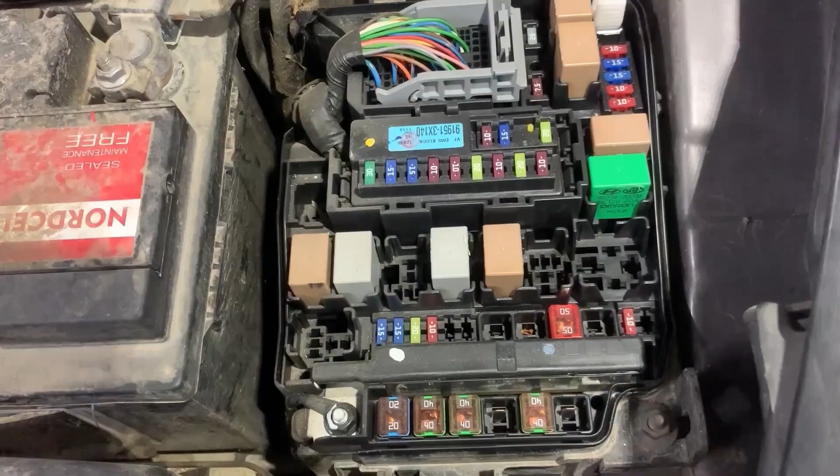Before I show you the location of the fuses, first I'm going to show you how to test them, using a test light and a multimeter. First I'll show you with a test light, and in order to test the fuses with a test light, we need to turn the ignition on.

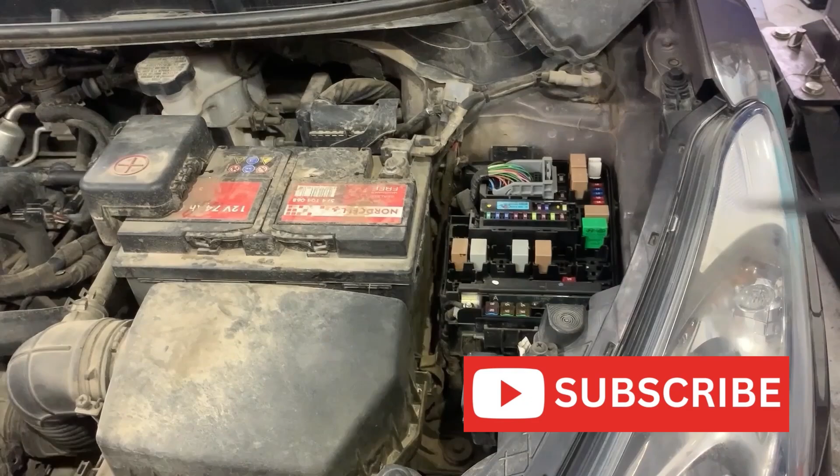This is the test light that I'm going to be using. You need to put the other end of the cable onto battery negative or chassis ground. In my case I'm going to put it on battery negative.

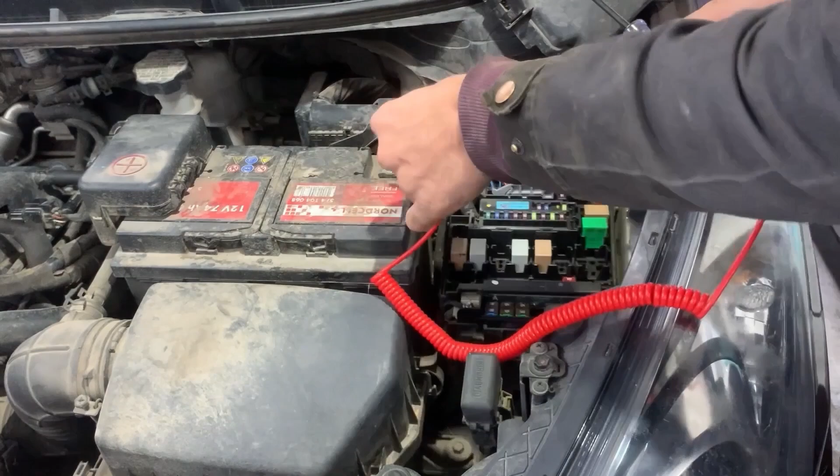So these are the fuses that I'm going to be testing. On each side of the fuse there is a pin that we need to touch with the test light, and they should both light up. If one of them lights up and the other one doesn't, that means the fuse is blown. If they both light up, that means the fuse is good.

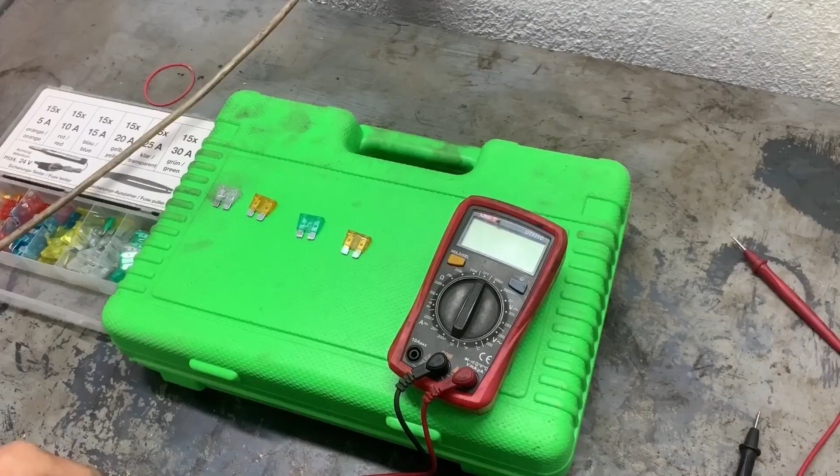Next we're going to test the fuses with a multimeter, to see if they are good or bad. This is what the fuse looks like, and this is the contact in the middle that connects to the two pins. If the contact is connected, that means the fuse is good. If it's burnt, that means there is an open circuit on the fuse and the fuse is blown.

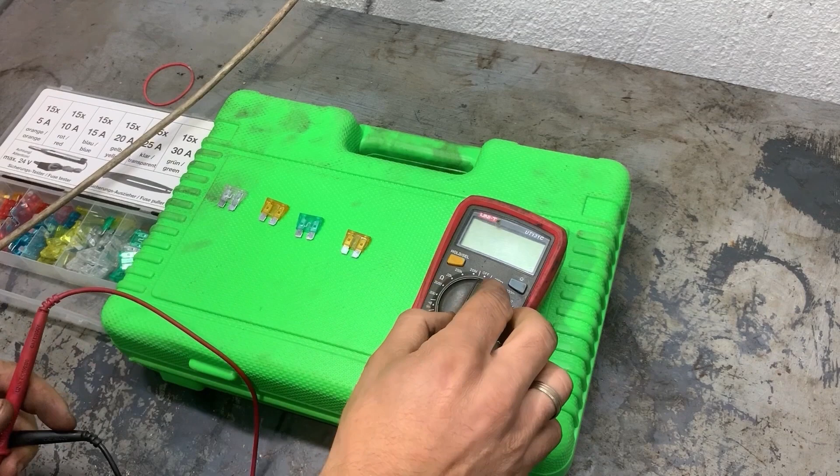So in order to check the fuses, we need to measure the resistance. Turn the multimeter on to 20k ohms and we'll start measuring. When measuring the resistance of the fuses, it has to be very close to zero. First we'll check the resistance of the two cables - it has to be zero as well.

Now we'll start testing the fuses. If it shows something close to zero, the fuse is good. If it doesn't show anything, that means the fuse is blown. If it shows a lot of resistance, the fuse is also not good.

The first one showed 0, the second one also shows 0 ohms, the third one shows 0 ohms, and the fourth one shows an open circuit. It doesn't show any ohms, nothing is changing. That means this fuse is blown.

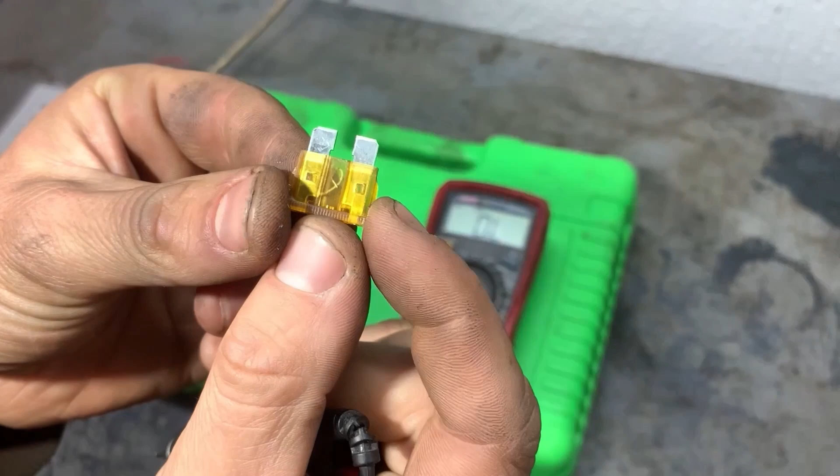Now we see what the condition of the fuse is visually. We can see that the contact in the middle is not connected to the two pins, so that's why it doesn't show any resistance, because it's an open circuit.

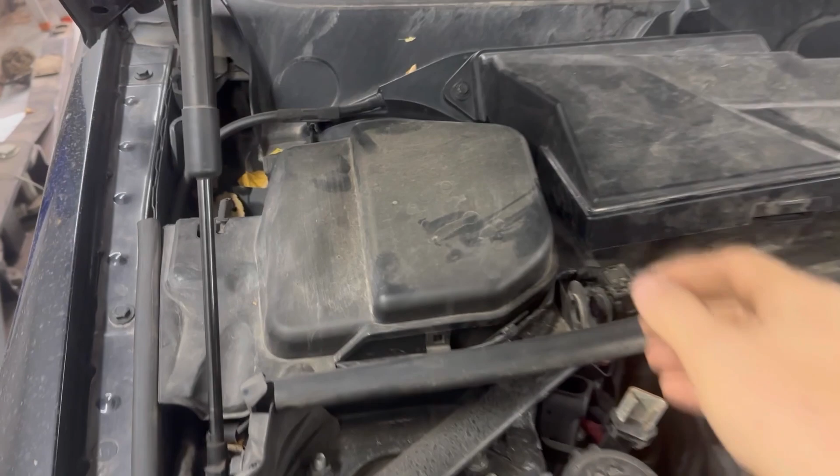Next I'll show you the location of all the main fuse boxes on this BMW E90 E91. There is one in the engine bay and one in the fascia. First, the fuse box in the engine bay: it's right underneath this black cover, and in order to remove it you have to unlock this clip, and there is another clip on the other side, then you pull it up.

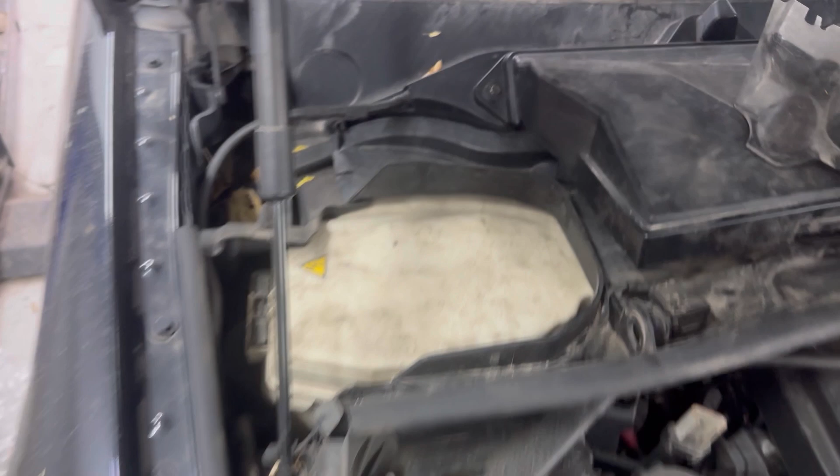The other main fuse box is located in the fascia, behind the glove box. So in order to get access to it, we need to open the glove box.

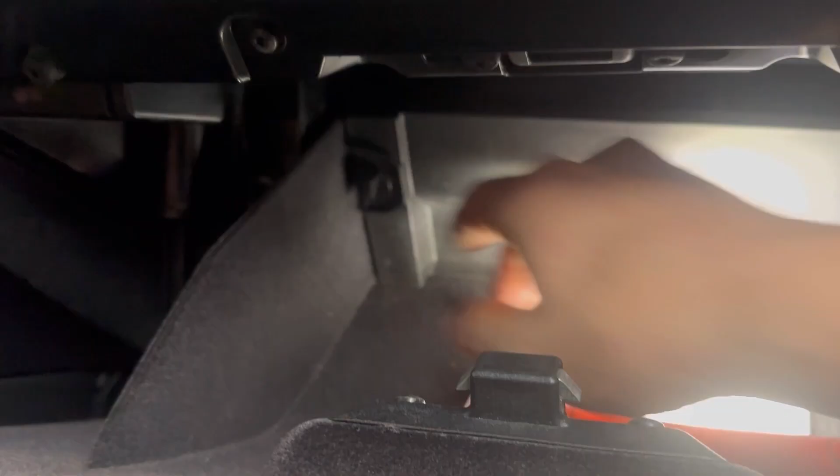When we open the glove box, there is a panel on the back that we need to remove. Those two screws we need to turn anti-clockwise, and then pull down this plastic panel, and we'll see the fuse box behind it. The fuse box is right there.

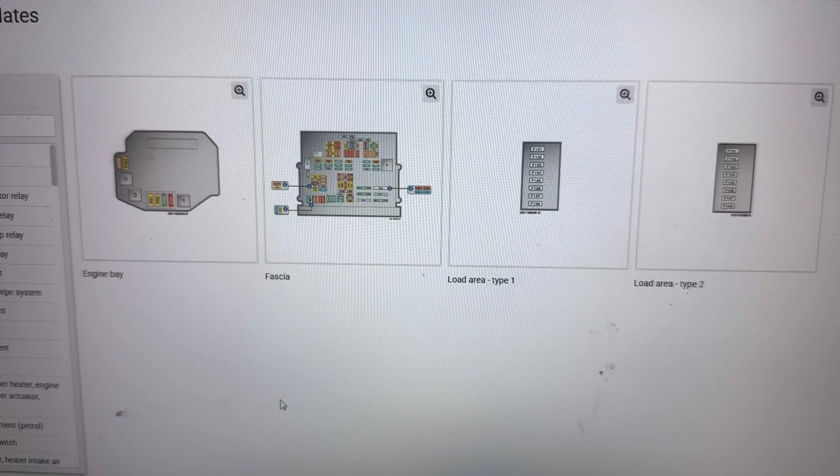Next I'll show you in the service manual all the fuse boxes on this BMW E90 E91. We can see there is one in the engine bay like I showed, one in the fascia, and then there is one in the load area, a very small fuse box. And these are all the fuses for those fuse boxes.

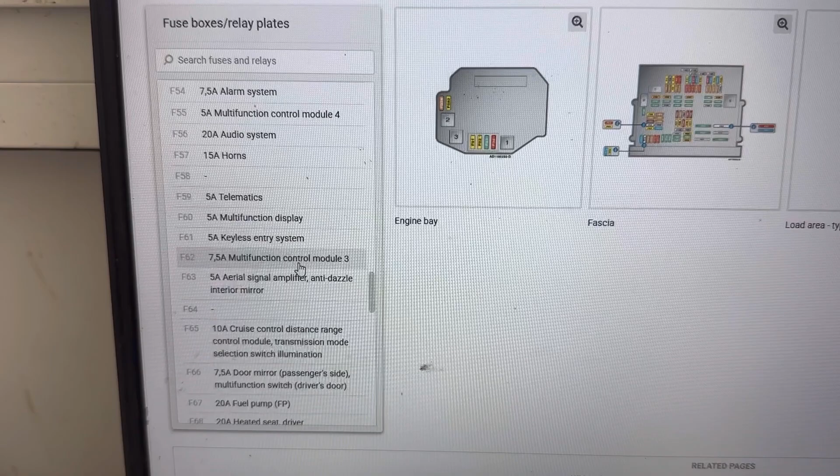Next, I'll show you the location of the fuses. In the search tab, we're going to type multifunction control module, and it will show us all the fuses for it. We can see there are a lot of fuses for the different control modules from 1 to 4, and I'll show you the location of them all.

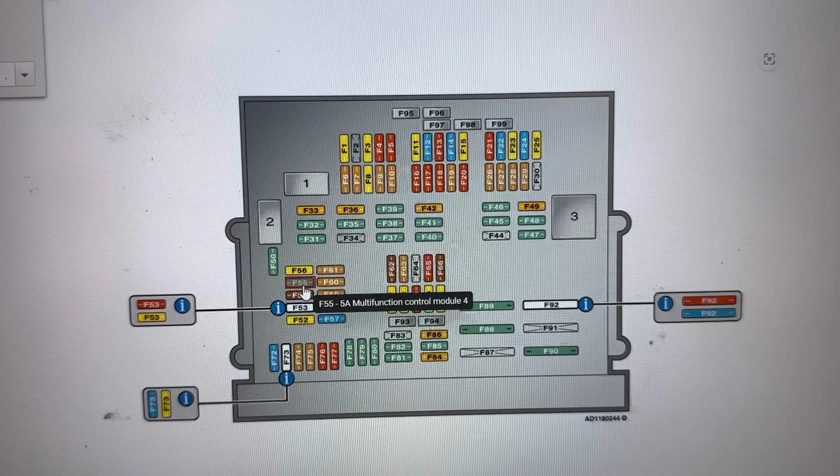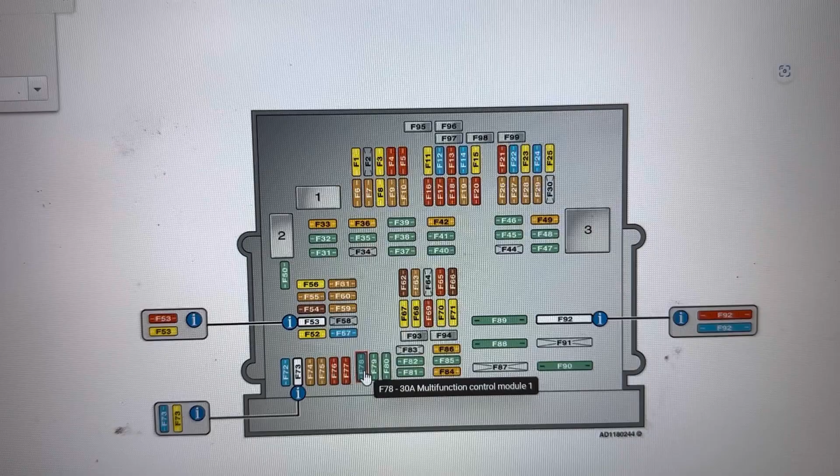The locations of the fuses are: F7 5A fuse, F25 20A fuse, F36 40A fuse, F41 30A fuse, F55 5A fuse, F62 7.5A fuse, F72 15A fuse, F73 15 or 20A fuse, F78 30A fuse, F79 30A fuse, F80 30A fuse, F81 30A fuse, F84 40A fuse, F86 40A fuse.